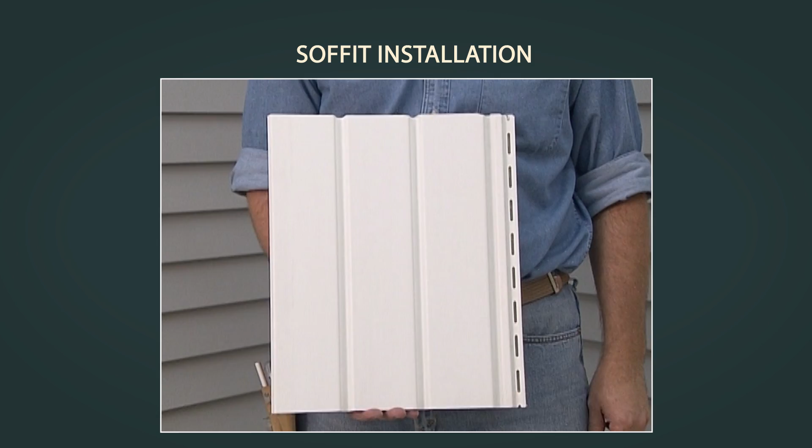Soffit covers the area at the eave of the roof or porch ceilings. Soffit comes in solid, vented, and combination panels in vinyl or aluminum. Vented panels allow critical airflow into the attic area.

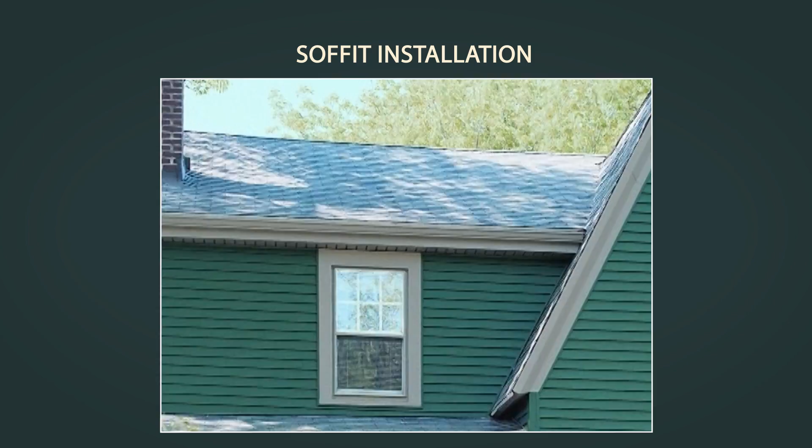Consult local building code for the proper amount of ventilation required. Local environmental conditions and building codes, especially in high wind zones, may call for different installation techniques. Always consult the manufacturer's instructions and local building codes for the correct soffit installation techniques.

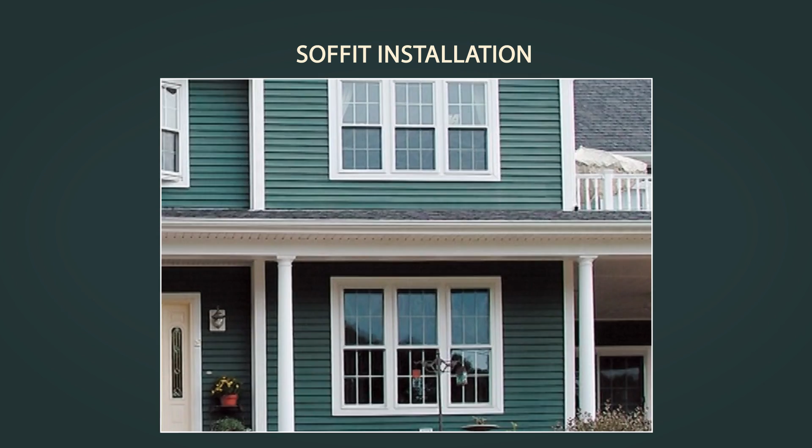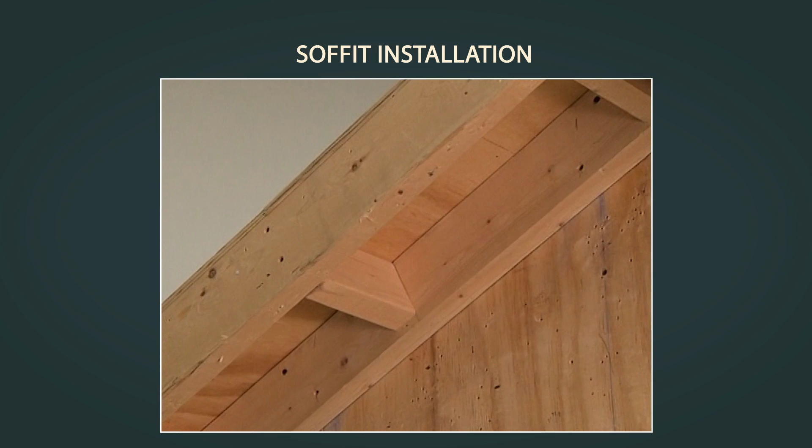The procedure used to install soffit depends on the construction of the eaves and gable. Open eaves have exposed rafters or trusses and are typical in new construction. Enclosed eaves have soffit already in place and are typical of re-siding projects.

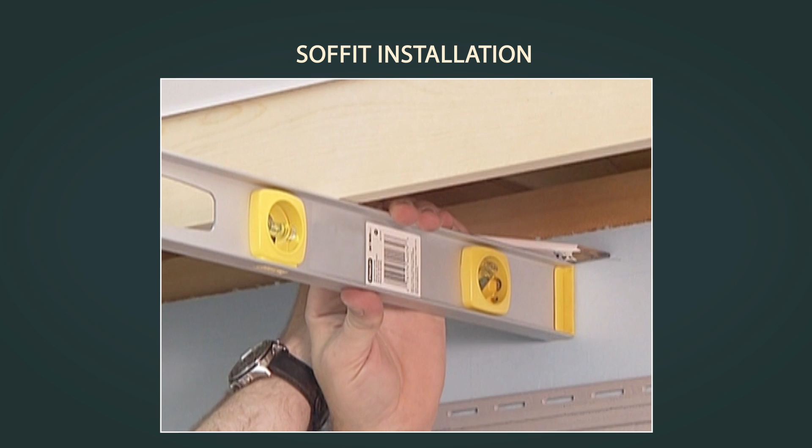The first step in installing soffit is to install a soffit receiving channel onto the wall. The channel must be applied level to the bottom of the fascia board.

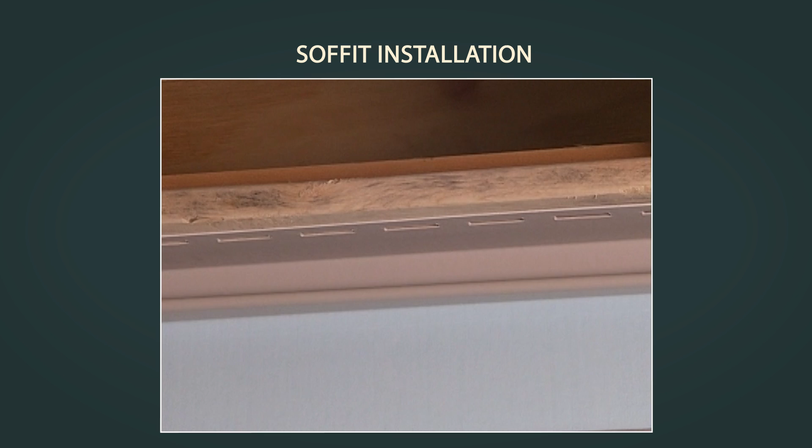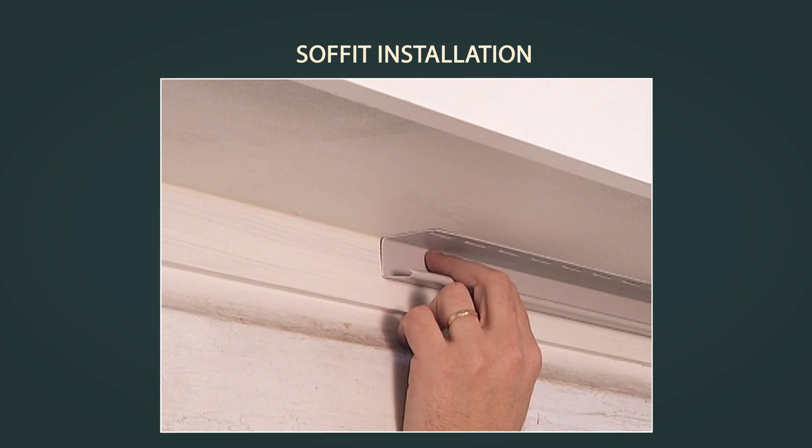For open eaves, an F channel can be installed directly to the wall, or a wood block strip can be used for installing J channel. You can also cut tabs in the nailing hem of a J channel and attach this modified channel by nailing into the tabs. For enclosed eaves, J channel can be attached directly to the existing wood soffit.

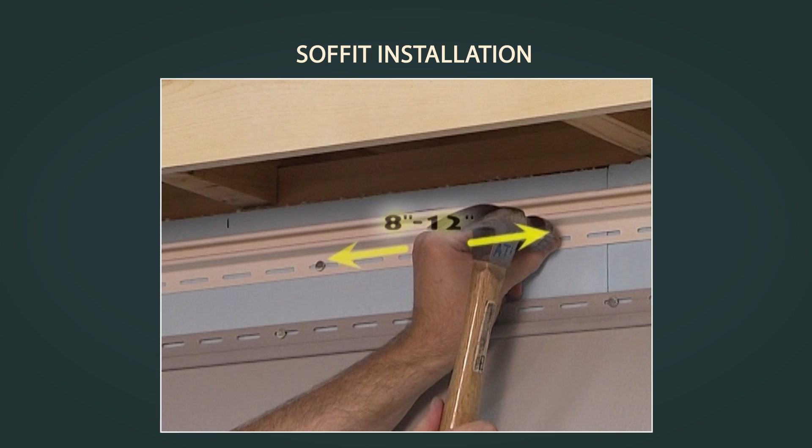Using any of these options, you should nail the channel a maximum of every 8 to 12 inches, positioning the nails in the center of the slots. Do not nail tight. Leave about a 1/32 of an inch gap.

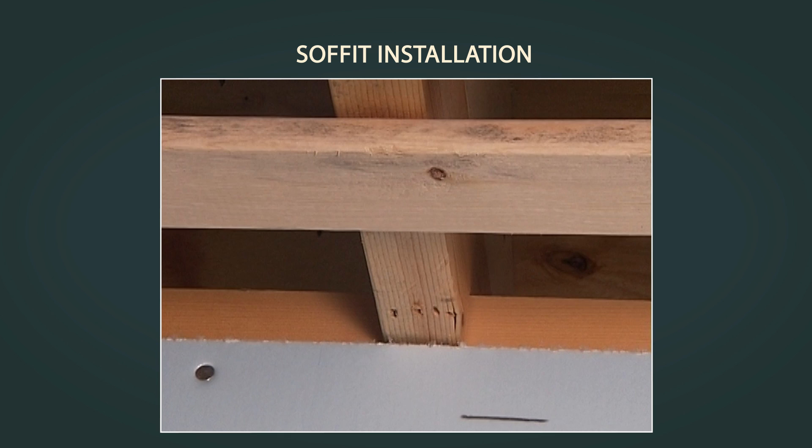In most cases, you are not required to install a receiver onto the fascia board. You must cut vinyl soffit panels to fit the span. If the span is more than 16 inches, you must use intermediate nailing strips to reduce the span and prevent sagging. Always follow the manufacturer's recommendations.

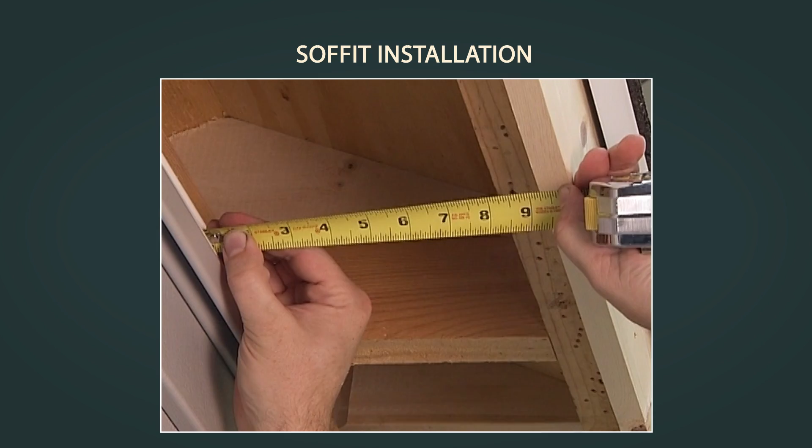Measure from the wall to the fascia board. Subtract 1/2 of an inch to allow for panel movement. Mark this measurement on the panel.

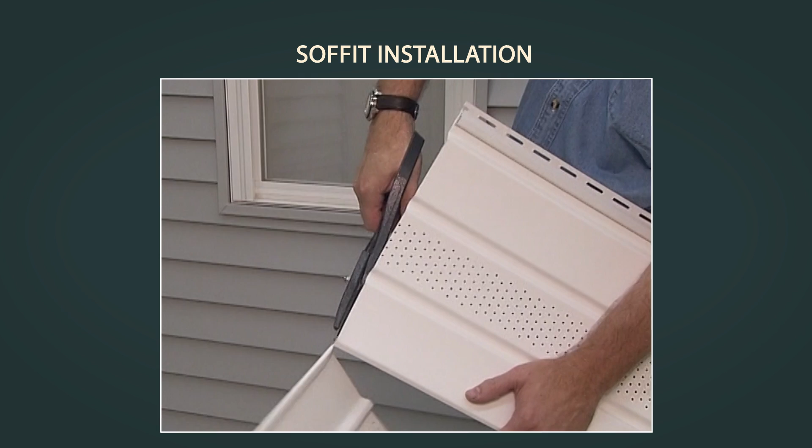Use tin snips, a circular saw with a fine-toothed plywood blade installed in reverse direction, or a vinyl siding blade to cut soffit panels. Insert the panel into the receiving channel while checking that the panel is square. Then nail the other end into the fascia board. Use a painted trim nail and fasten it through the nail flange into the V-shaped groove of the soffit.

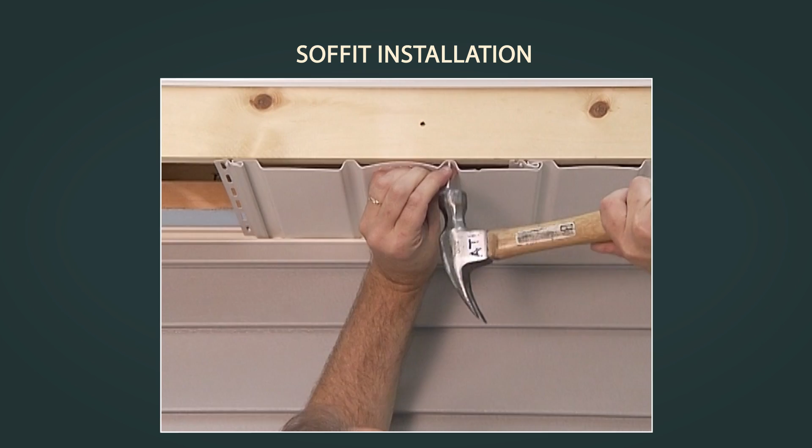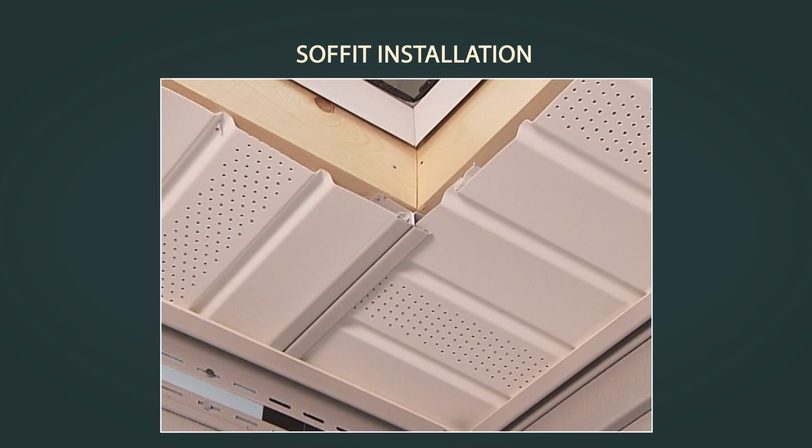When turning a corner, you usually install a transitional channel to receive mitered panels. In some cases, where adjacent soffits are different dimensions, you must make a square corner. You can use back-to-back J-channel, a factory-formed H-divider, or a field-formed aluminum T-channel. With all these options, make sure the channel system is securely attached.

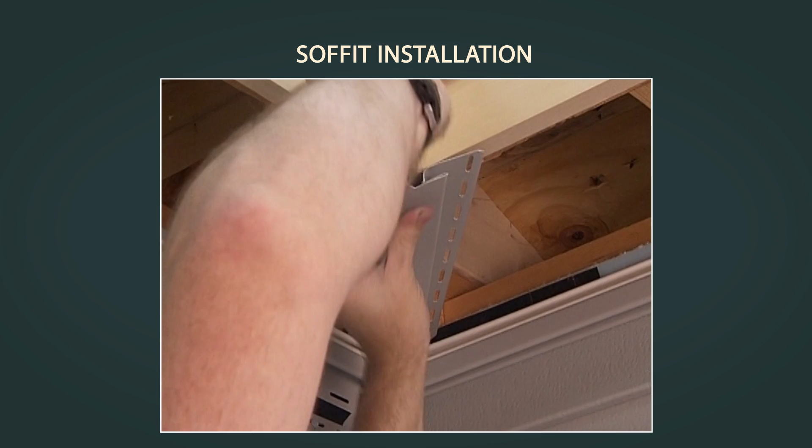Now, miter the soffit panels and install. At the peak of the gable, use back-to-back J-channel to make the transition.

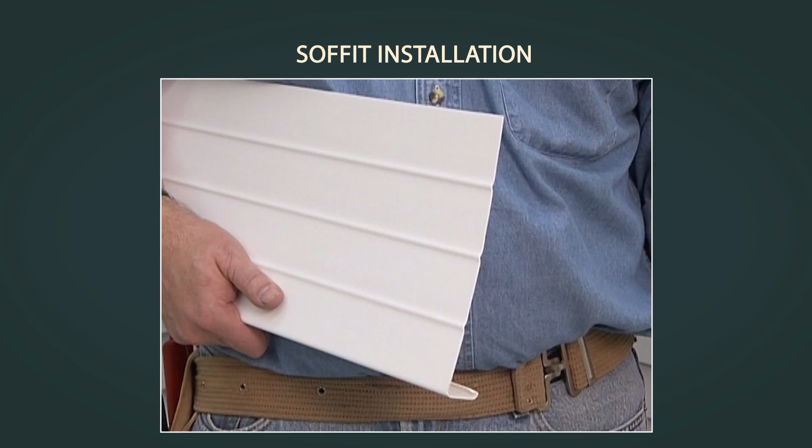Fascia covers can be factory-formed vinyl or aluminum. However, they are usually field-formed from aluminum trim sheet on the portable field brake.

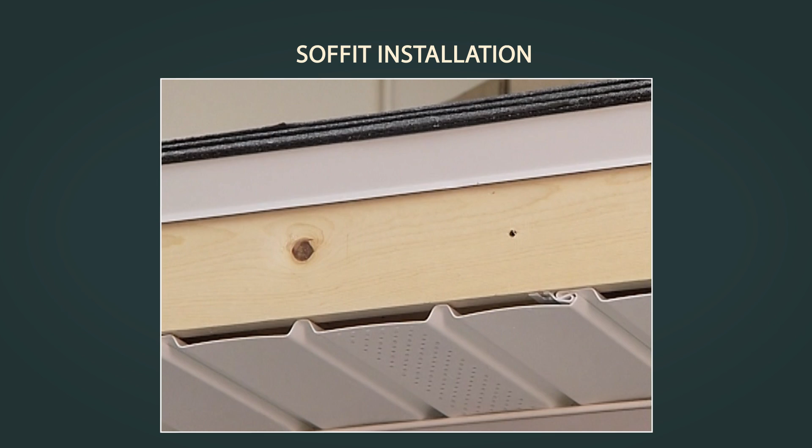To field form a fascia cover, measure the board to be covered. Keep in mind that the formed fascia has to cover the edges of the soffit panels. Form the desired shape. Make sure to include a hem to eliminate waviness of the trim coil.

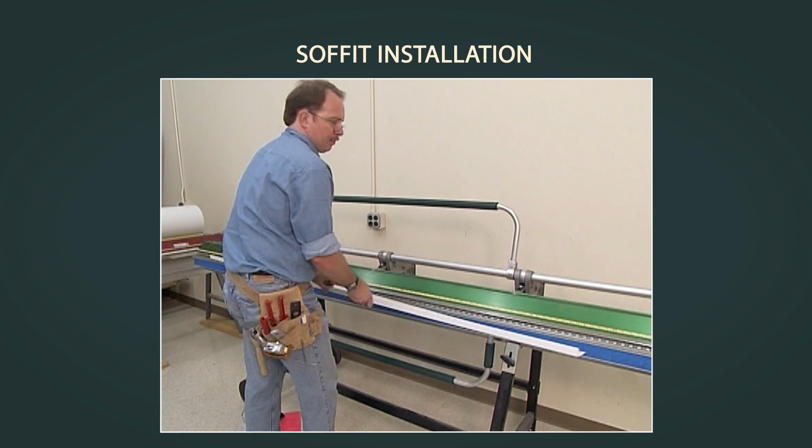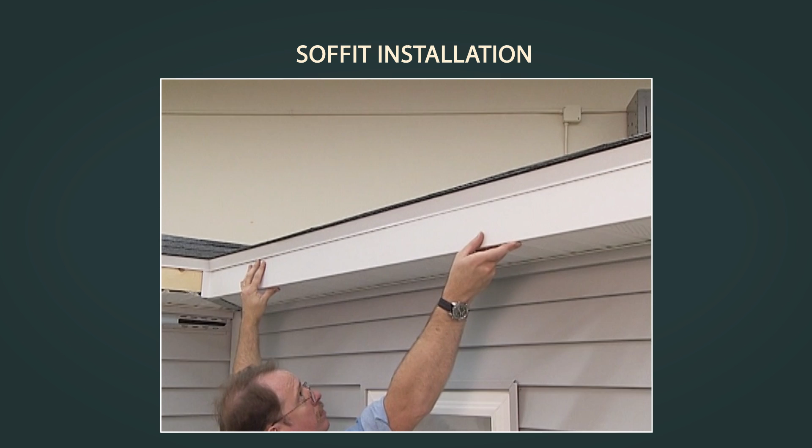Now install the formed piece onto the wood fascia. In most cases, the top of the fascia cover slides behind a roof drip edge. If a drip edge is not present, utility trim can be installed to receive the fascia cover.

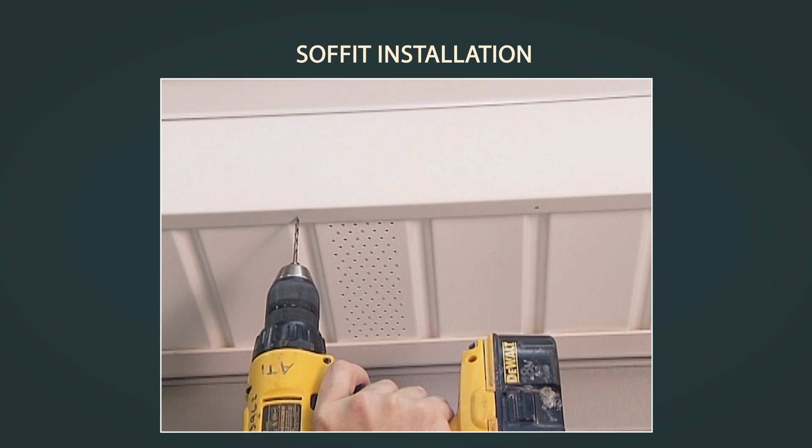To install aluminum fascia, pre-drill nail holes a maximum of every 24 inches, aligned with the V-shaped groove in the soffit. Never nail trim sheet tight to the wood surface. If more than one length of fascia is required, overlap two pieces to ensure a smooth appearance.

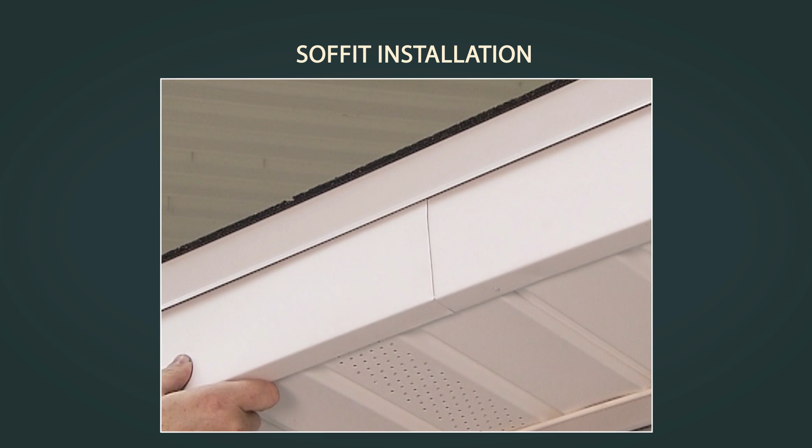When installing vinyl fascia covers, always follow the manufacturer's installation instructions. An F-channel must be installed onto the bottom of the fascia board.

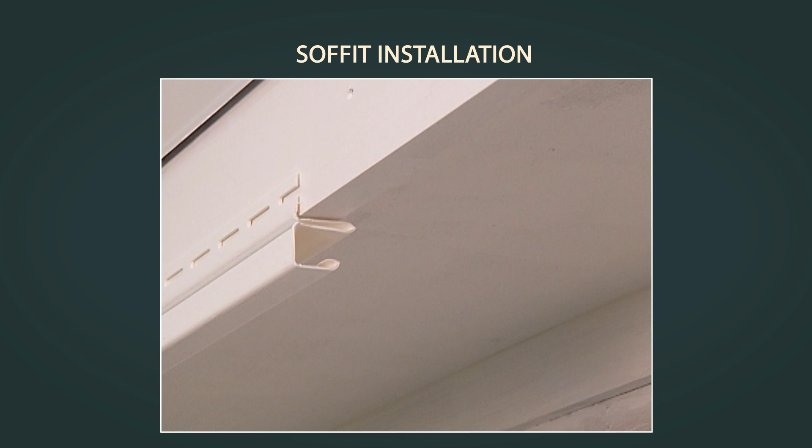When lapping vinyl fascia, cut 1½ inches of the lip and overlap by 3/4 of an inch. At inside and outside corners, overlap tabs a minimum of 1 inch and miter the bottom of the fascia so that the finish area is attractive.

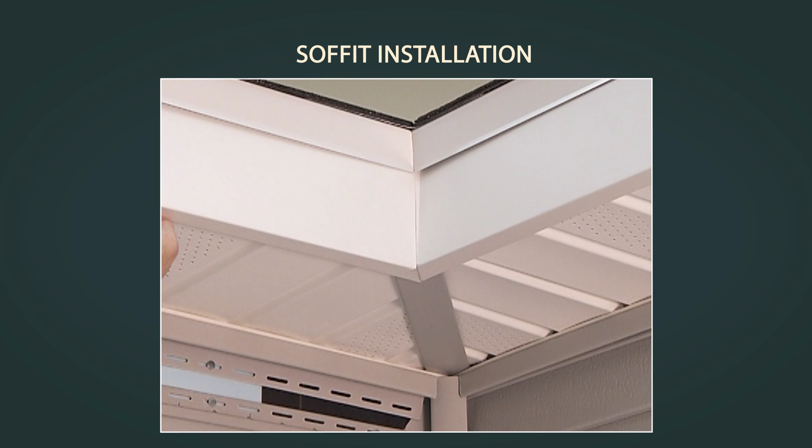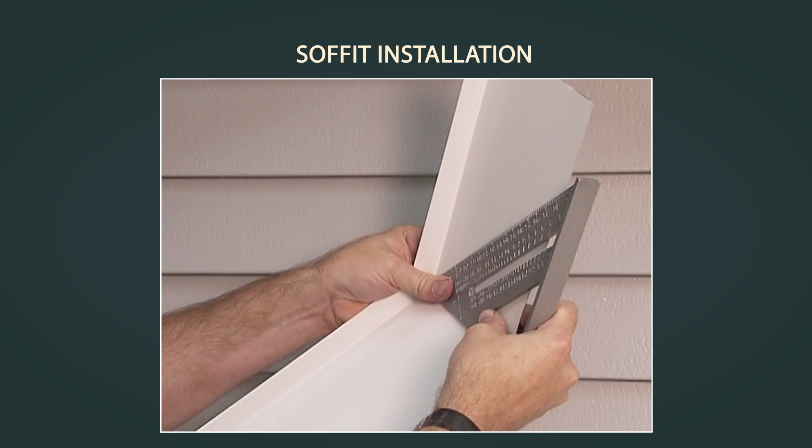Where a horizontal eave transitions to a gable or rake, framing must be installed to support a bird box. Create a bird box out of trim sheet or a vinyl fascia cover. Install the bird box as a fascia cover for the eave. The eave and rake fascia covers are installed after the bird box.